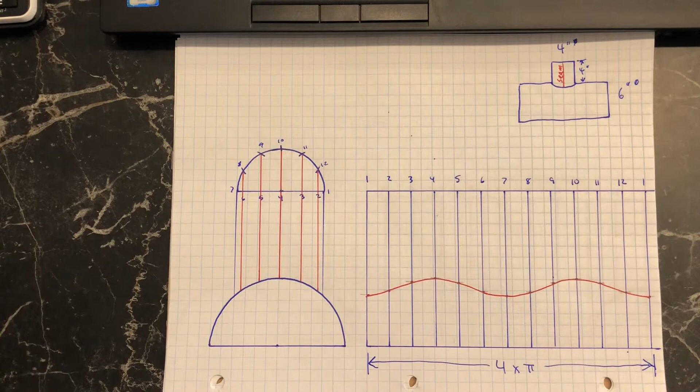Hey everyone, I'm just gonna do a slight review on doing parallel line with tees. So if you can see here, I have a 4-inch round piece of pipe teeing into a 6-inch round piece of pipe. It's 4 inches long, and I've put the seam on the long side here.

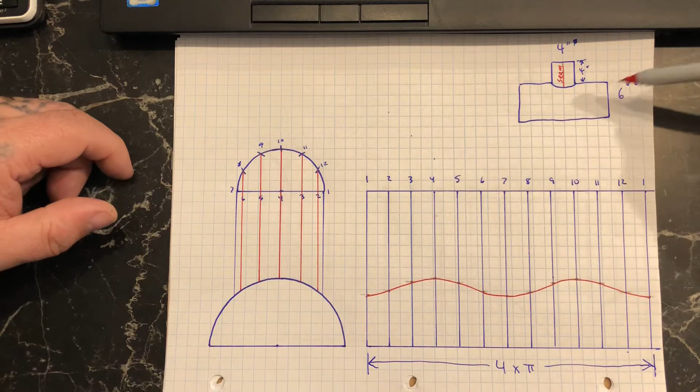Typically it would be on the short side. I just wanted to show how this would look if the seam was on the longer side. But most of the time you're gonna have the seam on the short side. So first step is to make an end elevation view.

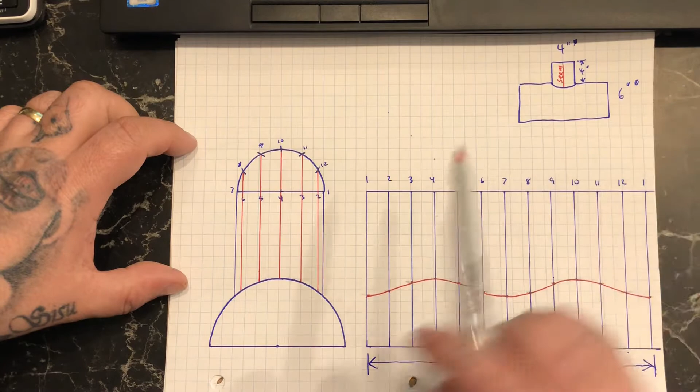So I did a half profile of the 6-inch pipe here because I don't need the full one. I came up the 4 inches off the center for the height and then made the 4 inches across and did a profile on top. Now if you notice, this half here is the same as that half there.

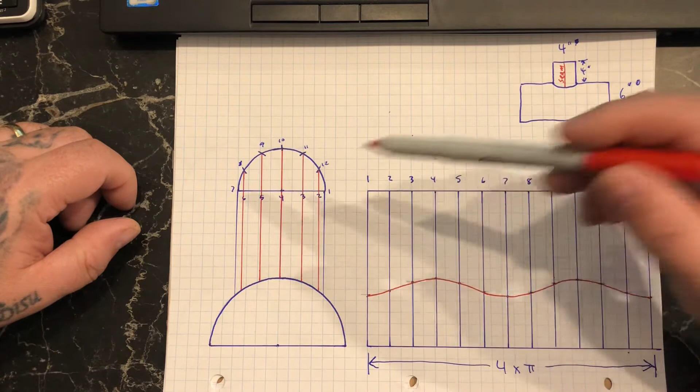So I didn't really even need to draw this entire end profile or end elevation view. I could have got away with just a half of it. But just for the purpose of this video, I wanted to show you the full one. So once I've drawn that T in the profile, I divided it into the equal spaces.

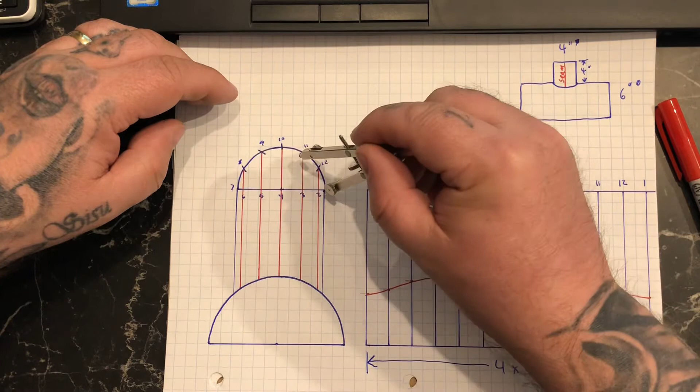If you remember, if I had this as the radius here, use my radius to swing the arc, and then use that radius off the center to make those divisions, and then off either end to make those divisions there. So once I've divided in 12 equal spaces, I drew those lines back down to the base pipe here.

Now that turns these lengths into true lengths, right? So from this point here down to here, from here down, all those lengths there where they actually hit the 6-inch pipe becomes a true length.

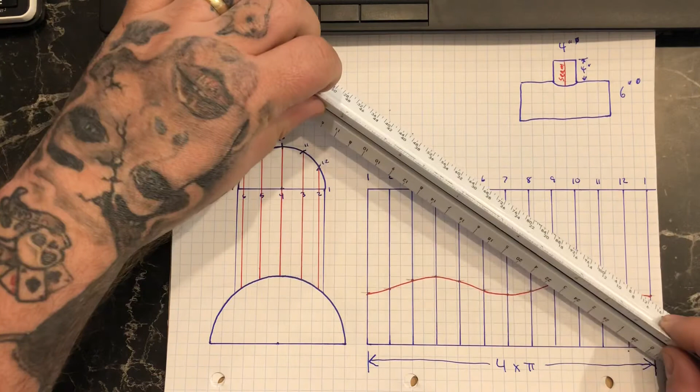So then I did my stretch out of the 4-inch pipe for the T, just 4 times pi, and divided it into 12 equal spaces. And I did that by putting my ruler on an angle to find 12 equal spaces in there. And then just simply moved these dimensions over here.

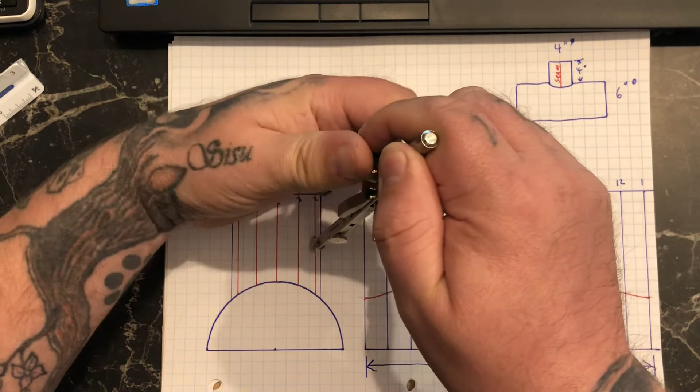So I just took the length of number 1, and that was my seam on either end. Now number 7 is also the same length there, so that was number 7. And then I went to number 2.

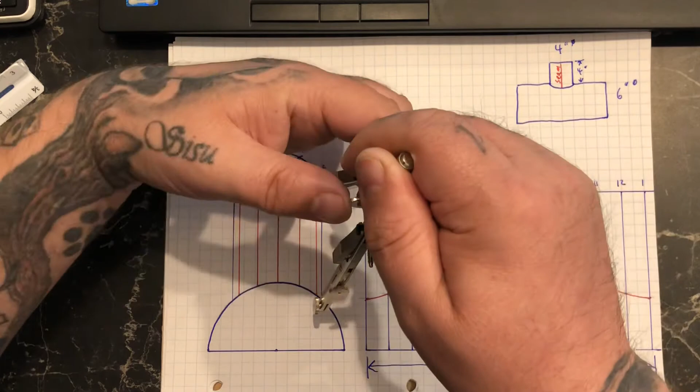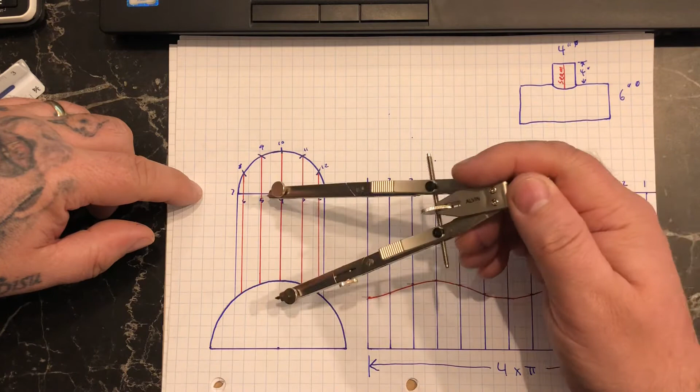Now 2 shares the same line as 12, and then on this side here, they also are the same length. So 2, 12, 6, and 8 are all that dimension. And then the same with 3. The height of 3 does 3, 11, 5, and 9. And then 4 and 10 are the last two.

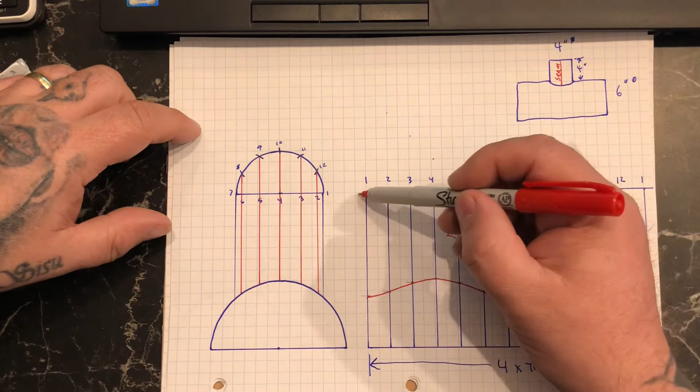And once you plot those lengths over, then you just draw a line, and that's the profile of your T. Shop instruction would be roll 360. And I have no seam allowances on this one. If there was a seam allowance, like a groove seam or whatever, I'd add that on to the end of that stretch out.

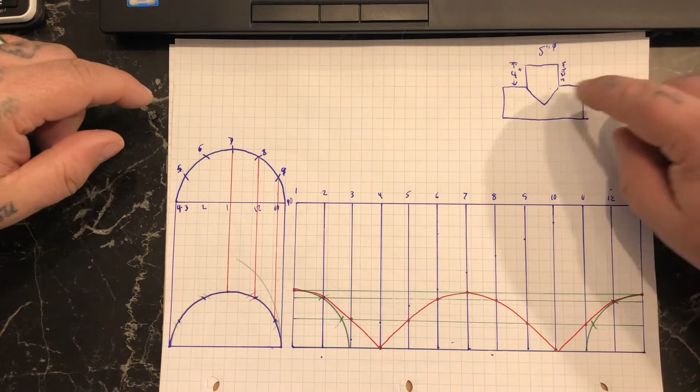I also showed an equal diameter T. So this one, there's a bit of a shortcut to it. So this is a 5-inch round on a 5-inch round pipe. So I did the same thing. I did a 5-inch round half profile here, did the T height, and then I did a profile on it.

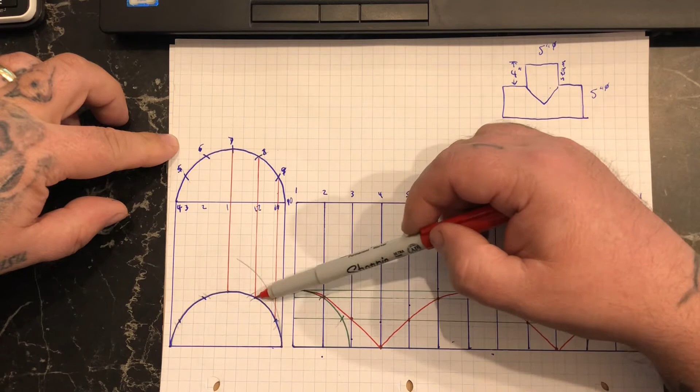The thing with when you have equal diameter, this profile here is exactly the same as this one. So if I did all this work and put these lines and brought down where it meets this pipe here, it's the same as if I just took that profile and divided it into equal spaces. So I actually don't even need to draw any of this.

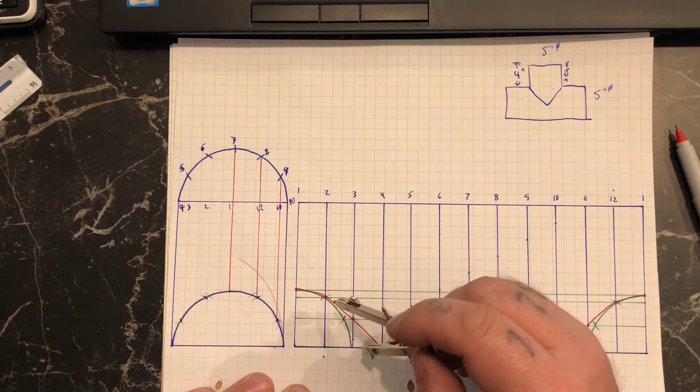I can just take this radius here of the 5-inch pipe, and I have my stretch out of the pipe, so 5 times pi. If I just take that profile or the radius and draw a circle on this end, divide it into equal spaces, and do the same on this end, divide it in equal spaces.

And then if I draw lines connecting those, 1, 2, 3, and make sure you don't forget the very top of the circle. The very bottom of the circle is also going to be technically a line.

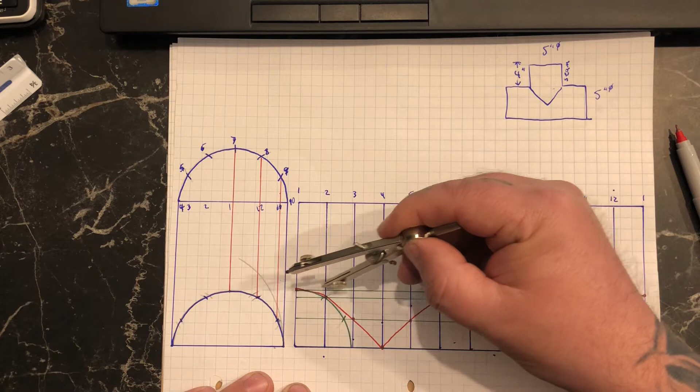Then it's just a matter of starting at the highest point where the seam would be. In this case, the seam is on the short side. So the seam is on the short side here. It's just a matter of following these green lines I put, starting here, over one, down one, make a mark, over one, down one, make a mark, over one, down one, make a mark, and then when I'm at the bottom, then I just go back up again.

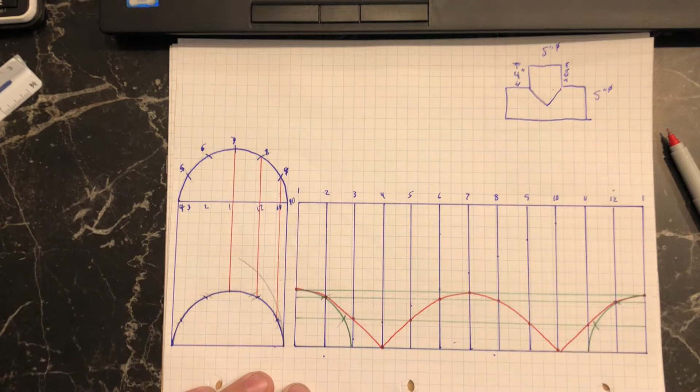Over one, up one, over one, up one, over one, up one, till I'm at the top, and then all the way back down, and then back up until you're at that seam again. And then that profile ends up being the pattern for this one. So again, roll 360. And no seam allowances again on that one.

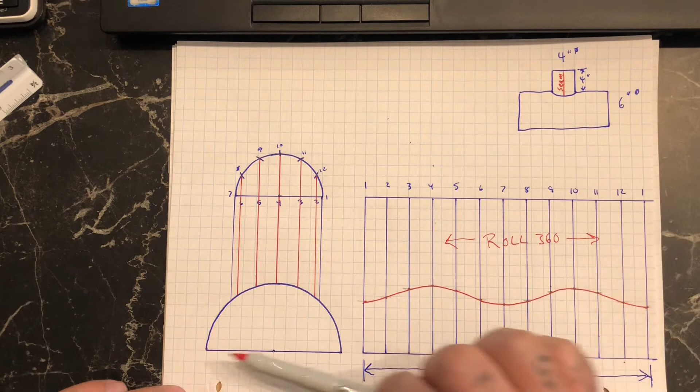The last one I wanted to show you, well, actually before I move on to the last one, for either one of these two, any tee that's 90 degrees, so if this one was flat on top or flat on bottom, if it said FOT or FOB, I would need to draw this end elevation, and if it was flat on one side, I wouldn't have this coming off the center of the pipe. I'd move the whole tee over till it's flat on the one side, and then do the same thing.

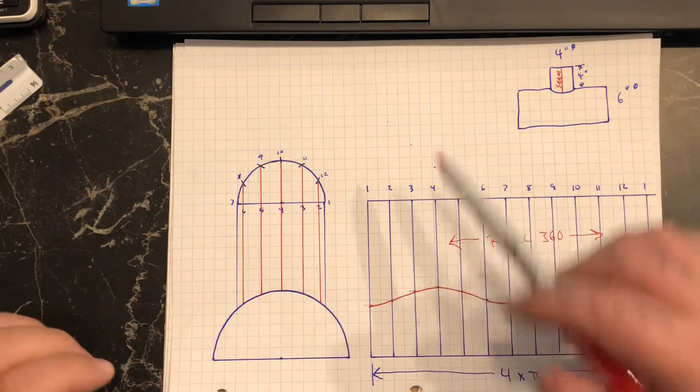And then wherever you divide that upper profile and those lines come and hit this pipe here, that's going to determine how your pattern works out. So any 90-degree tee, just an end elevation view is all you need. Or if it's an equal diameter, all you really need is half the profile, or a quarter circle actually, to lay out the pattern. Now, if it's on an angle like this, I don't have enough room to do the whole stretch out here, but I just wanted to go over the process of defining your true lengths.

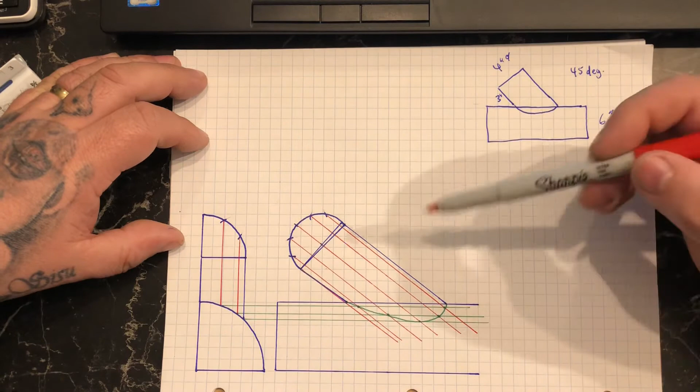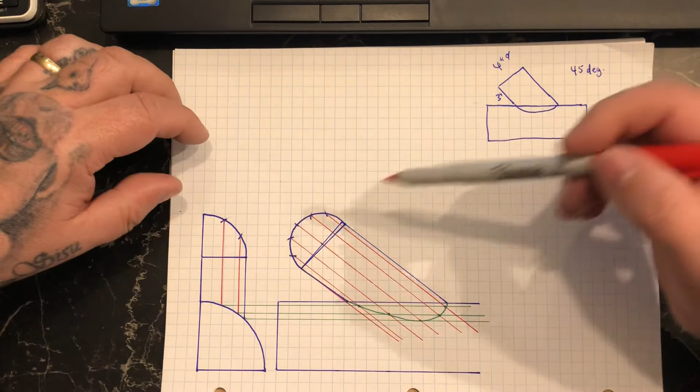So here we have a 4-inch tee going onto a 6-inch round pipe. The tee's at a 45-degree angle, and the inside length here is going to be 3 inches. I need 2 views to actually get true lengths here. If I took that angled tee and turned it to an end elevation, which I have here, there's no true length on it because this whole thing's leaning down towards me. So these lines are not going to be true lengths. So I have to develop true lengths from the side elevation. So I basically need to draw both elevations to be able to get these true lengths here.

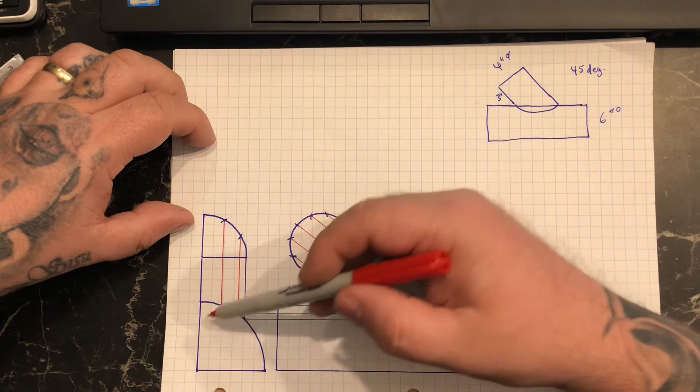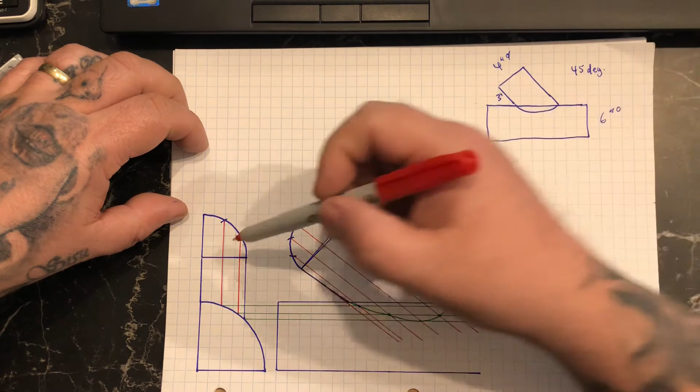So I have to lay out a miter line. With the end elevation here, I just used half of the 6-inch pipe profile. I went up just an arbitrary length. This could have been shorter, it could have been longer, doesn't really matter. What I'm trying to do is get these points here where the tee touches the 6-inch pipe. So I just did a random length, did a quarter profile of the 4-inch pipe, did the equal divisions, brought them down to where they hit this 6-inch pipe, and then I transferred those lines across.

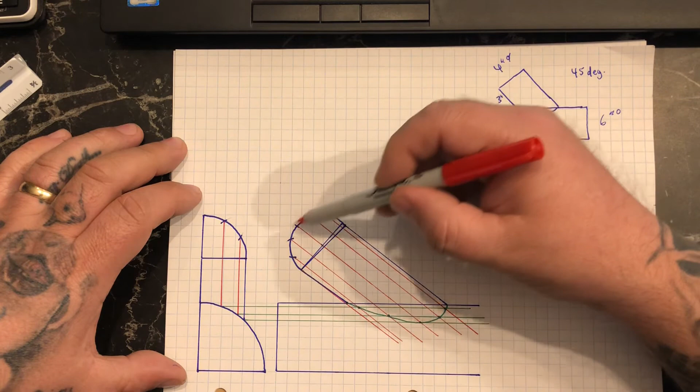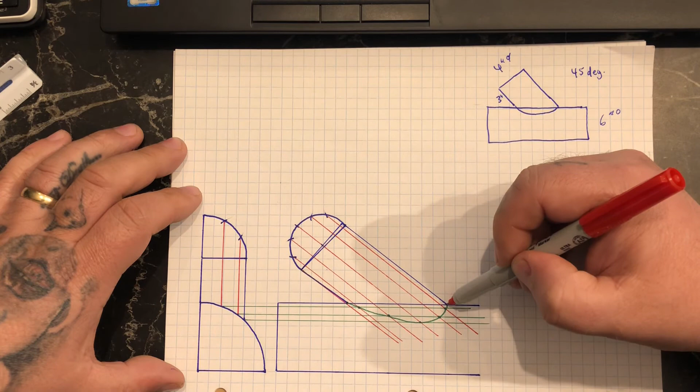Then I did a side elevation view of the pipe. I did half of the 6-inch pipe here, 45 degrees, made my 4-inch pipe with 3 inches here. Did a profile on the top, divided in equal spaces, brought those lines down, and wherever these lines intersect these lines, that's where I put a dot. So again, starting right at the crotch, I went over one, down one, over one, down one, over one, down one, till I was at the lowest point, over one, up one, over one, up one, over one, up one. And then that gives me a profile.

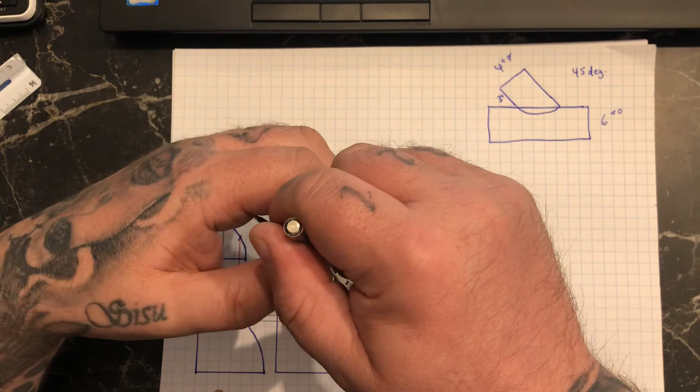And then if I had my stretch out laid out, I would take each one of these lengths, probably starting at the inside crotch, because that's most likely where the seam would be. That is a true length, and I'll transfer that to my stretch out. And then that one, etc., right? In all the appropriate spots.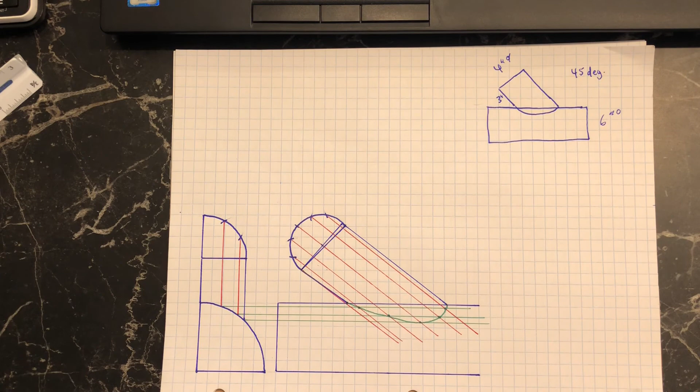I know this is not perfect, but this is hopefully just a review for tee layout. I'm going to be making another video shortly showing a tee on a taper. That one there is a lot more complicated, but this should at least warm you up to the whole idea of parallel line.